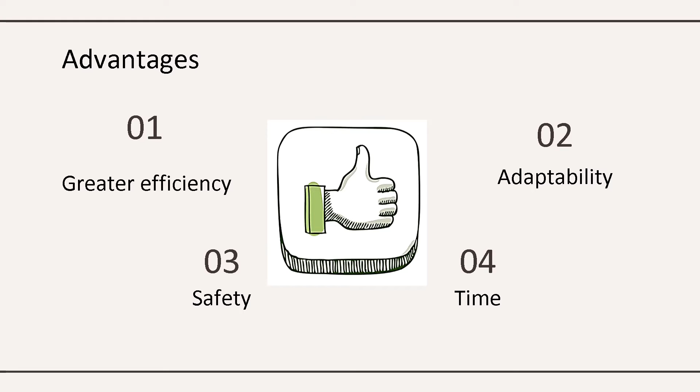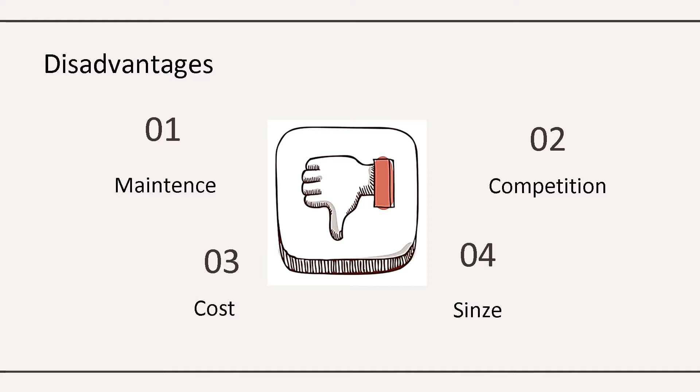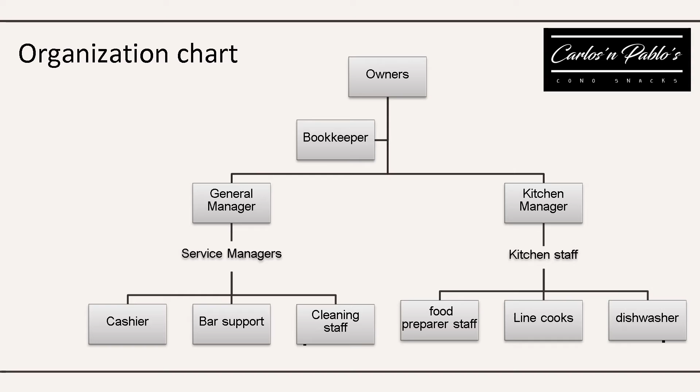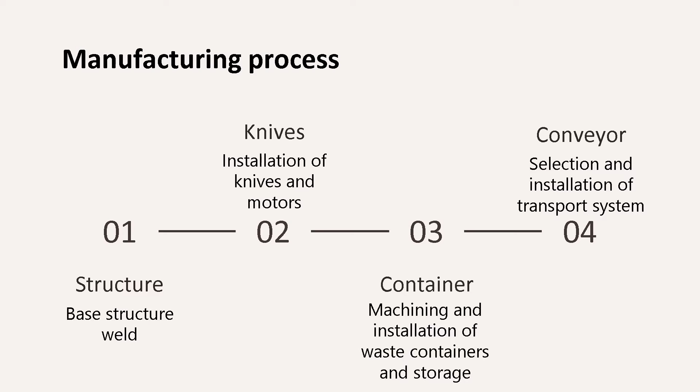Finishing with the mechanical system, the conveyor belt or whatever transport system selected for the product is installed. Continuing with the control system, we begin by installing the necessary electrical wiring as well as the control system to the base structure.

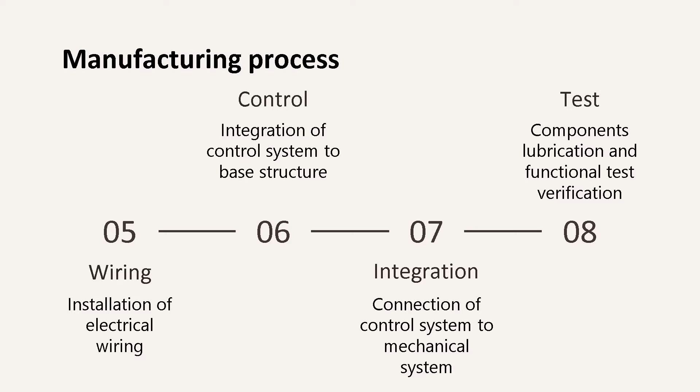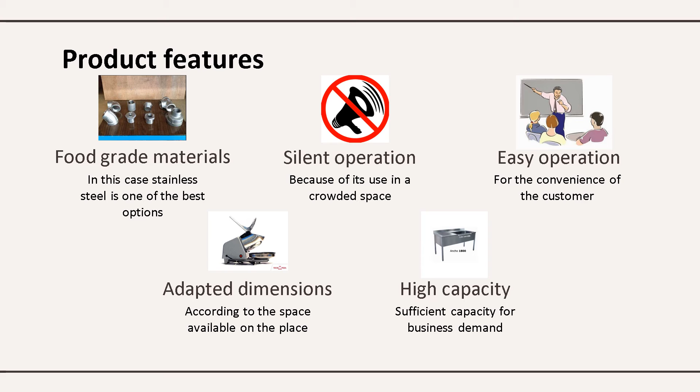Another aspect of vital importance is to respect the space available for installation of the machine, because this could interfere with other processes carried out in the place. Finally, it's very important to be able to meet the product demand of the business, which allows a saving of energy and effort.

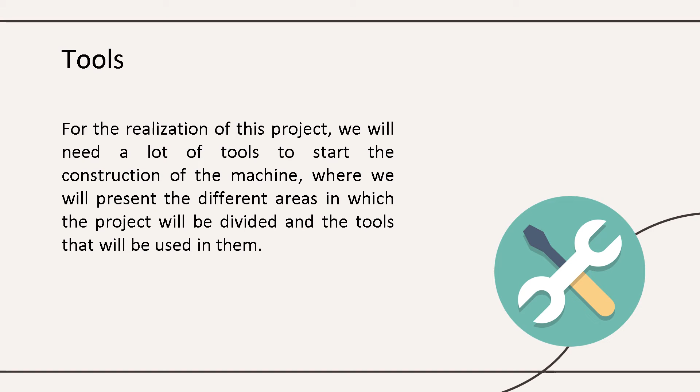For structure tools: the idea is that the skeleton is made of PTR, and this is lined with galvanized sheet. So these are some of the tools we use: welding machine, polish machine, cutting machine, level, measuring tape, and drill.

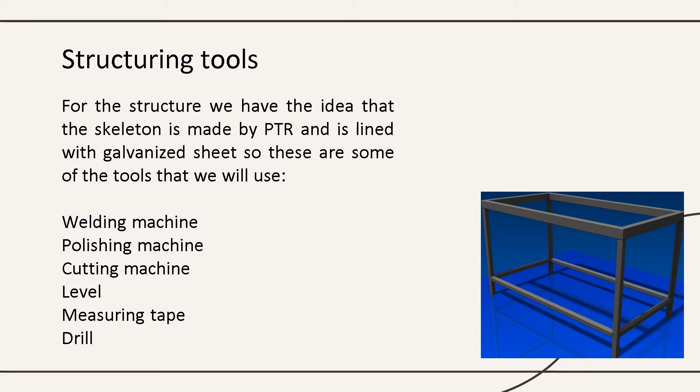Electronic tools. One of the bases of this project is electronics, where we will have to make boards and controls for this project, using tools we used in the past during our university career, for example soldering iron, multimeter, cutting tweezers, and the desoldering machine.

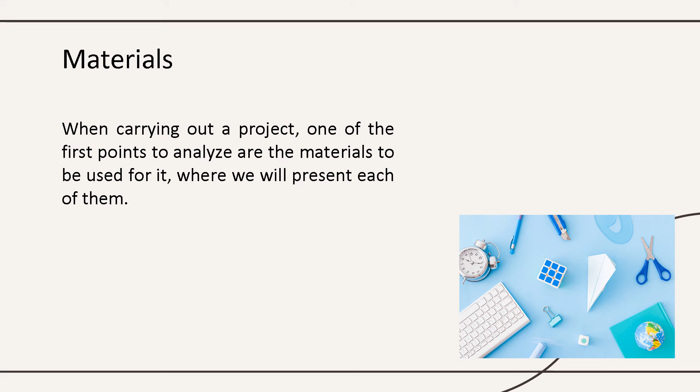One of the most important points in this project is the materials. If I don't have materials, I don't have a project. When carrying out this project, one of the first points to analyze are the materials to be used for it. We will present each of them.

Structure materials: the materials regarding the structure of this machine will be divided in two. The skeleton will be completely made of PTR and will have a cover made of galvanized sheet. The other part is where the potato is in contact with the machine: the hopper, the container, and the cutter. All of these will have to be food-grade materials.

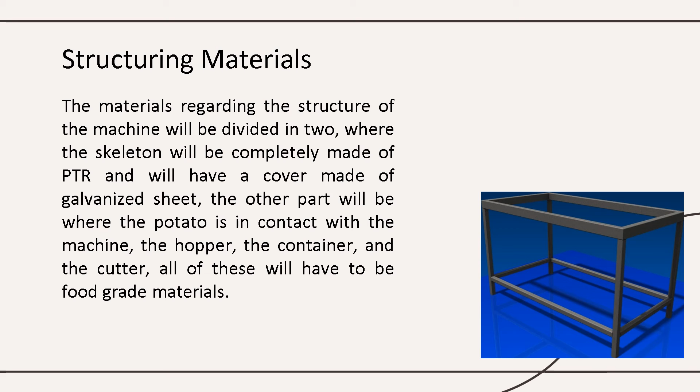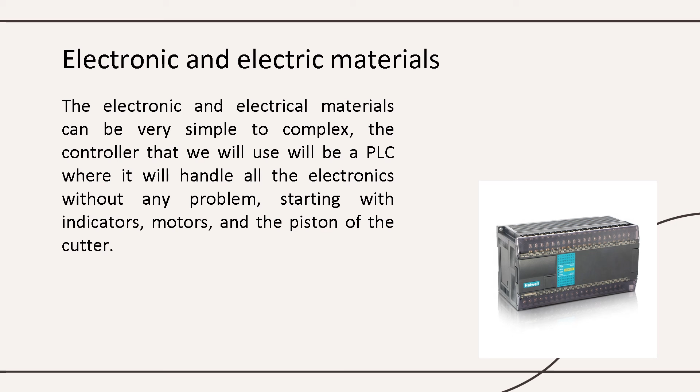Electronic and electric materials can be very simple to complex. The controller used will be a PLC, which will handle all the electronics without any problem, starting with the indicators, motors, and the piston of the cutter.

Cutting materials: for the cutting process, we will add a manual cutter with a piston controlled by the PLC to perform the cutting of the potato, where it is planned to use a frame made of blades.

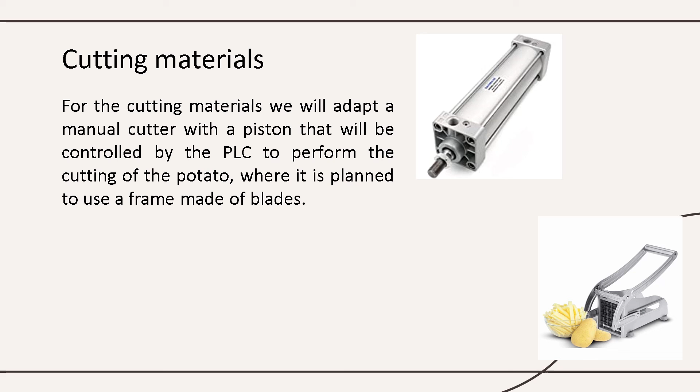Last point, the cost. The cost of this project is variable, because it is subject to where we get the materials available, or if there is a high price for shipping. We took on the task of finding the main materials for the project to see how much would be an approximate cost.